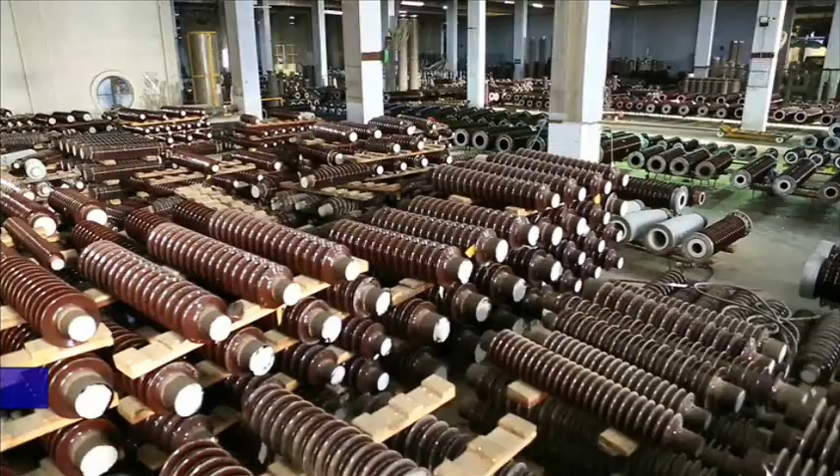Modern Insulators Limited was set up at Abu Road, Rajasthan by the Modern Group in 1985 in technical collaboration with Siemens Germany, a world-renowned company in the power sector, for manufacturing of high voltage and extra high voltage aluminous porcelain insulators. The group, led by Mr. Sachin Ranka, has 4 manufacturing divisions as under: Modern Insulators Limited, Modern Terry Towels Limited, Modern Denim Limited, Modern Foundry Iron and Aluminum Metal Castings. The Modern Group has a sales turnover of approximately $100 million.

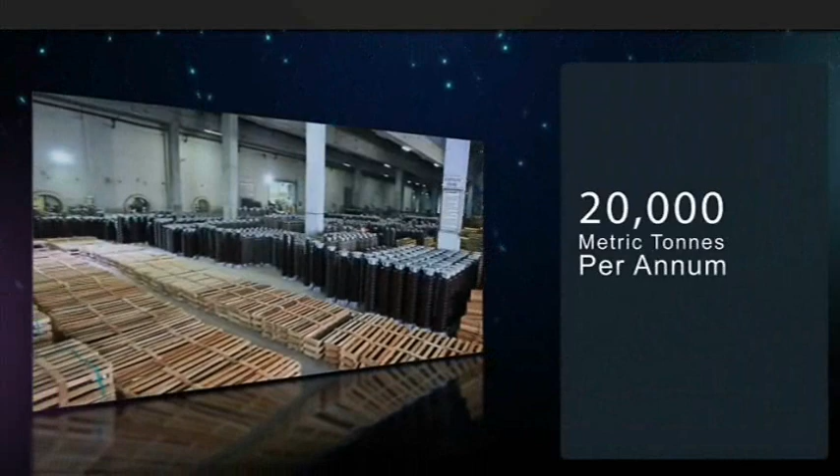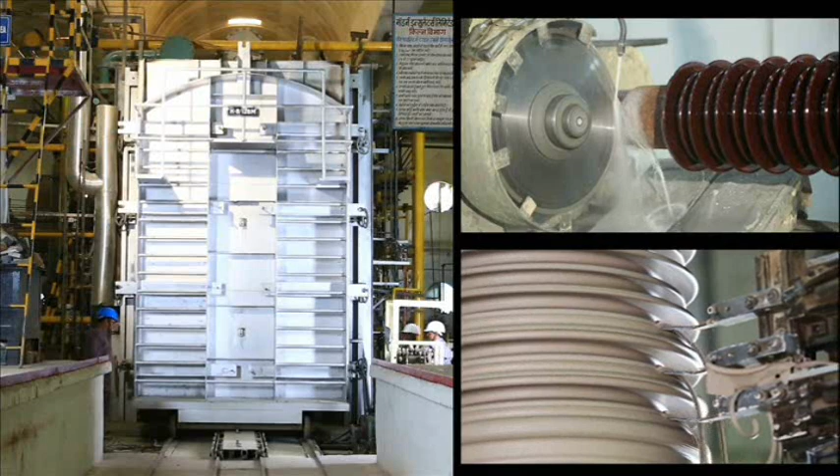The insulator plant currently has a capacity of 20,000 metric tons per annum. The export turnover exceeds $15 million, which is around 30% of the sales turnover. Modern is an ISO 9001 and ISO 14001 certified company. Modern has the most sophisticated manufacturing plant, with machinery imported from Germany, along with required testing and inspection facilities.

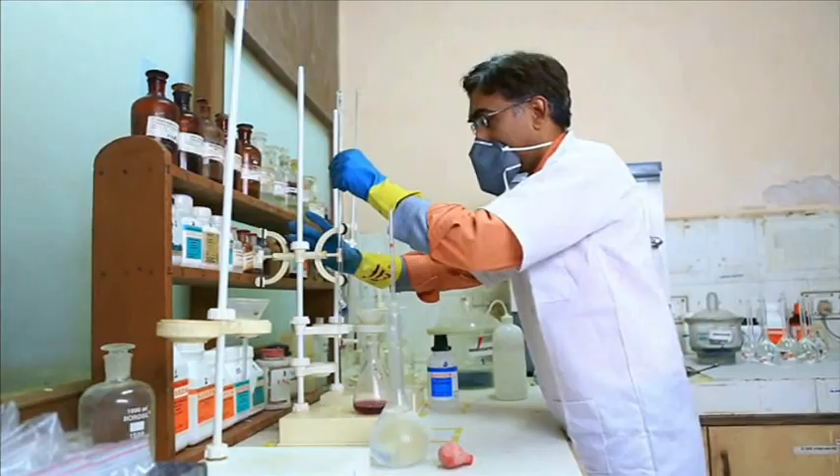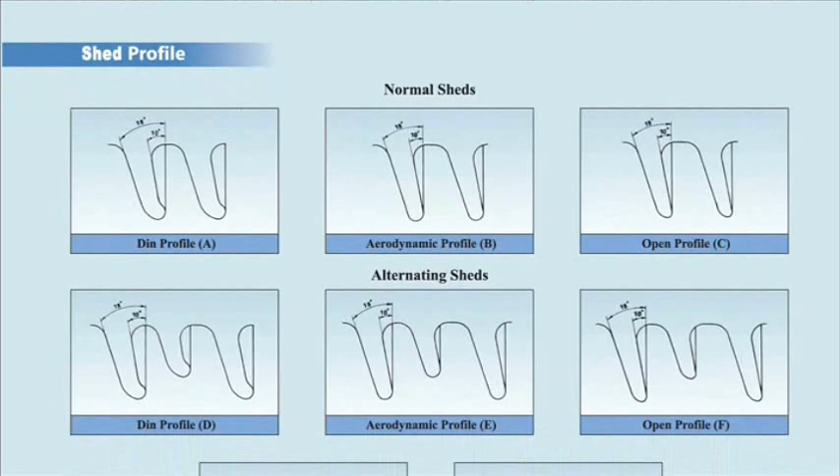Modern also has an in-house R&D setup recognized by Government of India for development of new products and process improvements. Design and development is done with latest setup and updated through computer-aided designing. Insulators are designed as per various shed profile parameters, which conform to all Indian as well as international standards. Special type shed profiles are also manufactured to meet application of insulators in highly polluted areas.

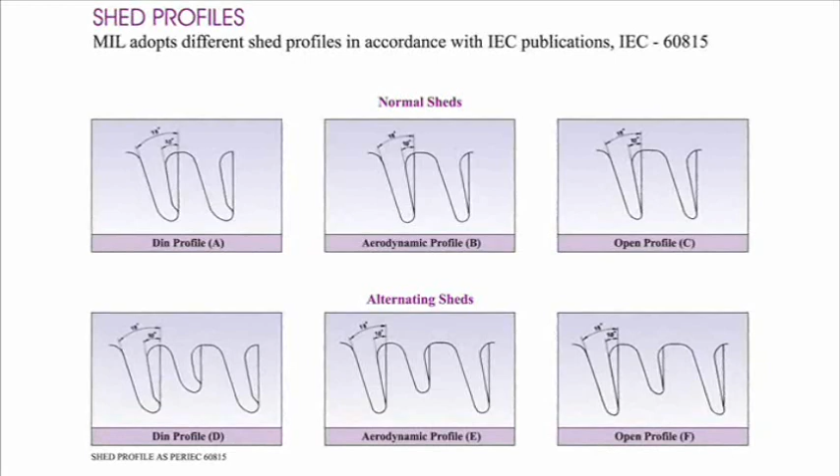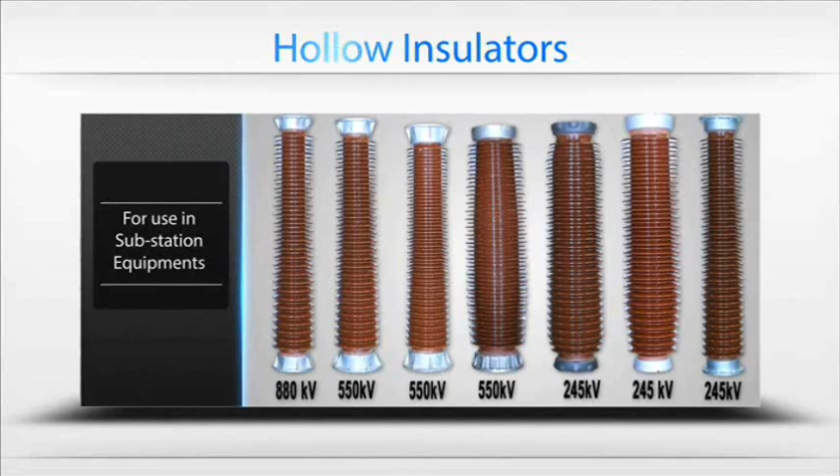Solid core station post insulators are used for high voltage disconnecting switches and in substations for bus post applications as well as wave trap supports. High pressure, high strength hollow porcelains are used for SF6 circuit breakers and instrument transformers. Modern manufactures various varieties of 25 kV solid core insulators required for railway electrification. Modern is one of the major suppliers of insulators to Indian Railways.

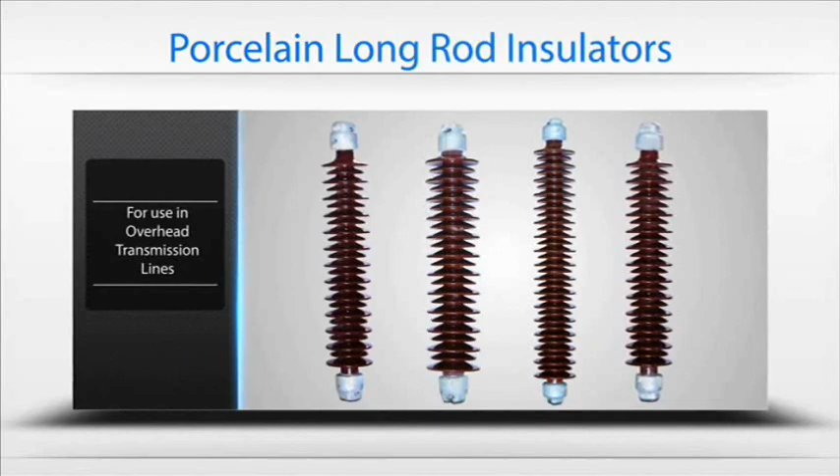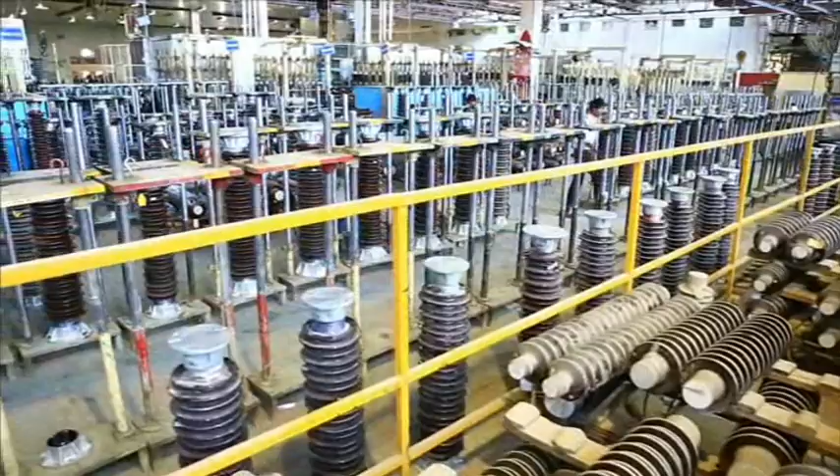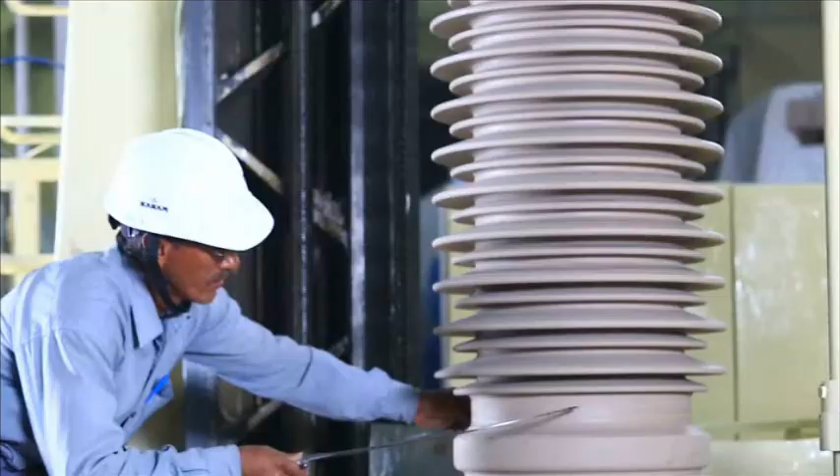Modern also manufactures long rod insulators for overhead transmission lines, which have distinct advantages over the conventional disc insulators. Modern is the first company in India to introduce the technically superior product for transmission lines as an innovation in the power sector. The plant receives technical support from many ceramic experts with respect to latest innovations in the ceramic field. Stringent quality control measures adopted in the entire manufacturing process ensure performance and reliability in service. Modern manufactures aluminous porcelain insulators with wet process technology.

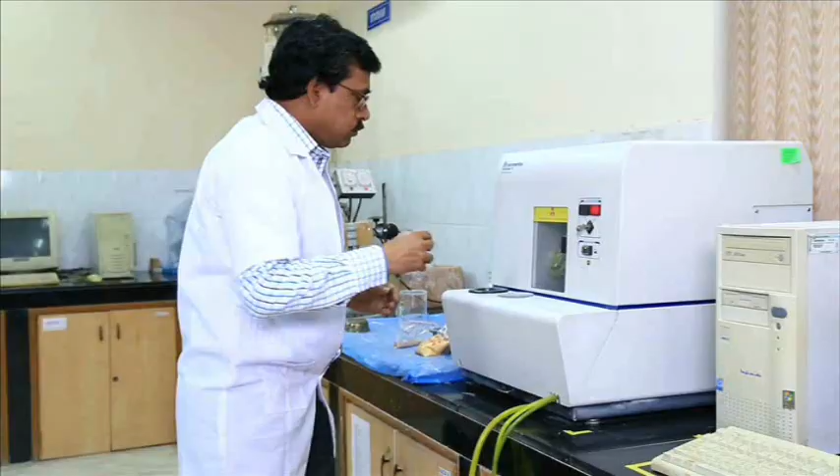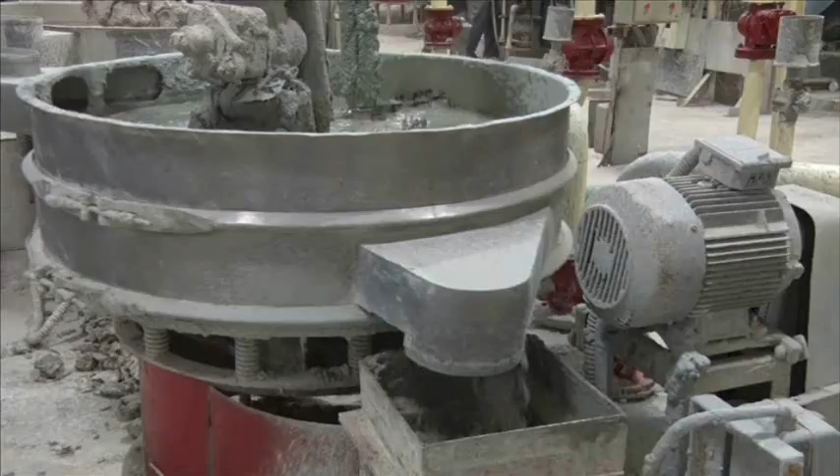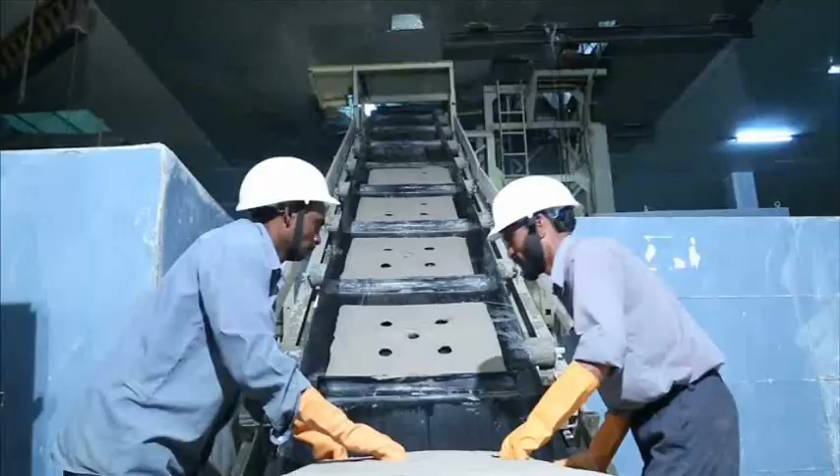The production process for manufacturing aluminous porcelain starts with a selection of raw materials. The raw materials received from suppliers undergo thorough testing at the in-house laboratory. After approval, the raw material is charged into ball mill, which carries out the grinding with a wet process technology. Liquid material in the form of slurry is prepared by this process. Slurry is filtered through ferrofiltering system to remove iron particles from it and then sent to filter press. High pressure filter presses are installed for cake preparation. These cakes are then transferred to pug mill through belt conveyor.

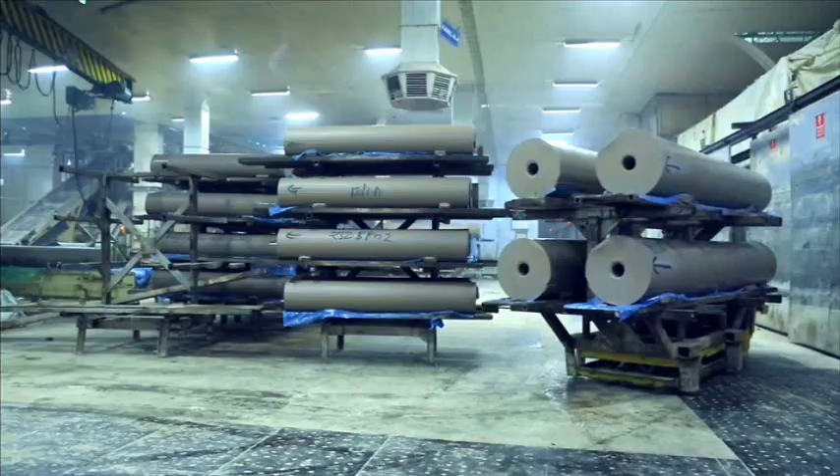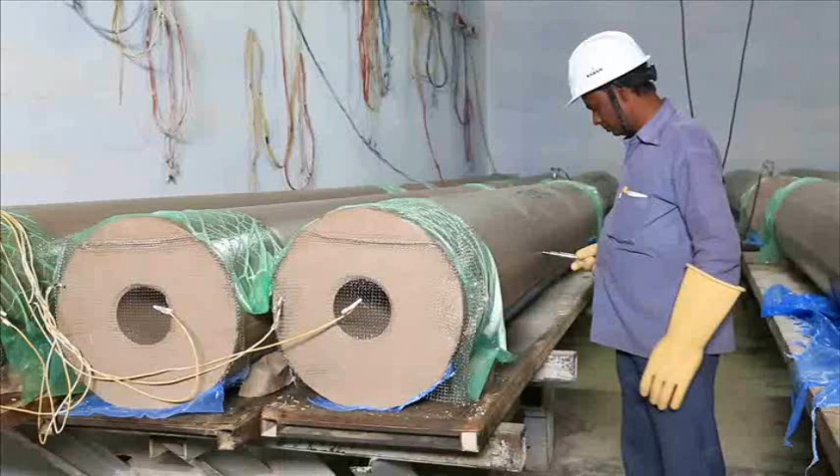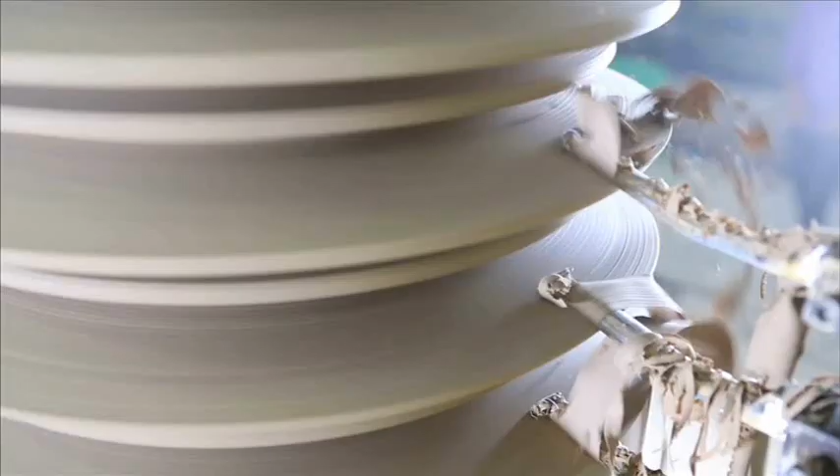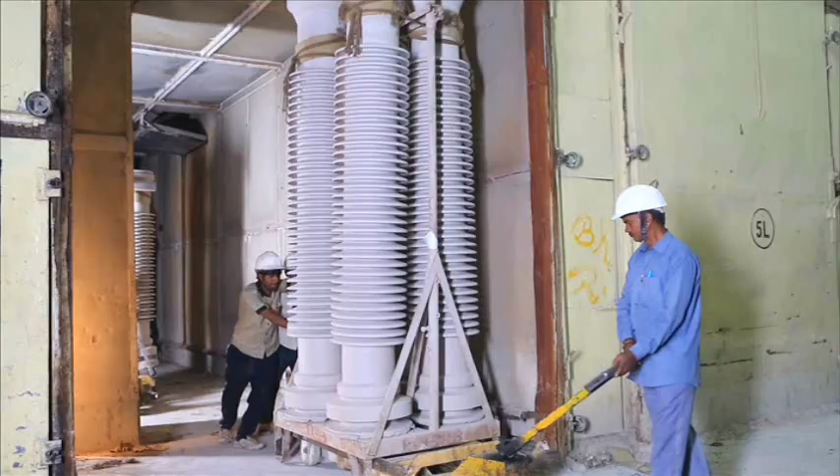Homogeneous pugs are extruded in high vacuum pug mills for solid core and hollow insulators. Pug electric drying controls moisture content, and online temperature is constantly monitored through data acquisition system in the control room. The pugs are turned in CNC and photoelectric automatic vertical shaping lathes. Greenwares are dried in microprocessor controlled dryers. Dried greenwares are then sent for finishing, glazing and graveling processes. The different glazes are tested in the plant's laboratory through glazing in brown, grey or any other color as per customers' requirements.

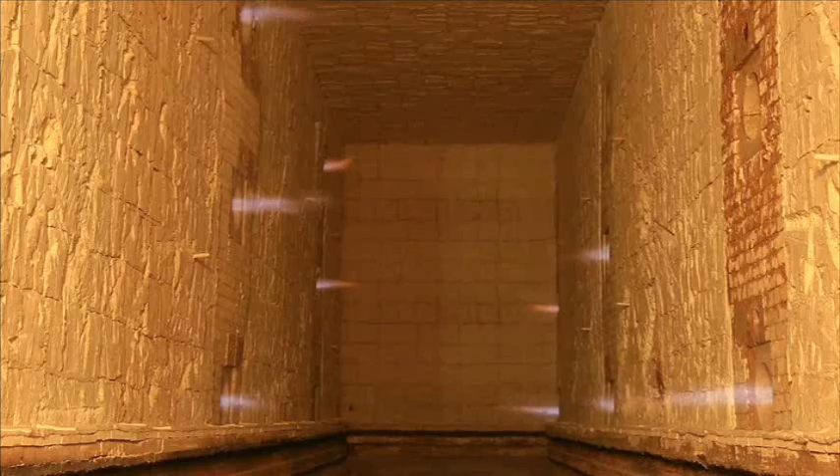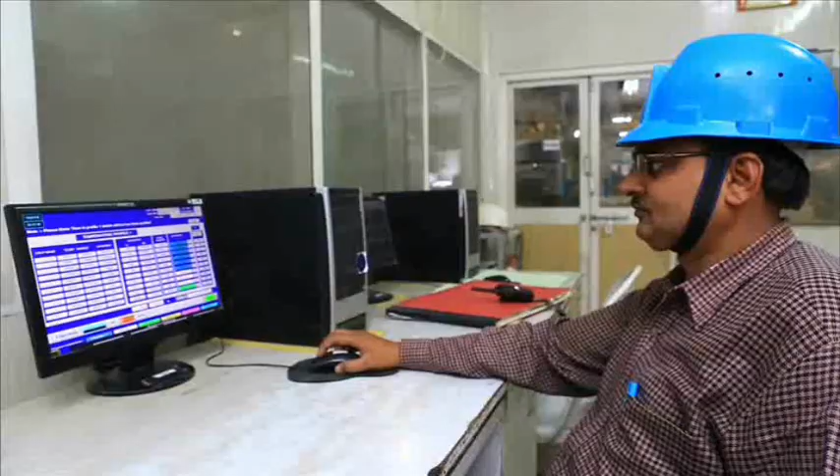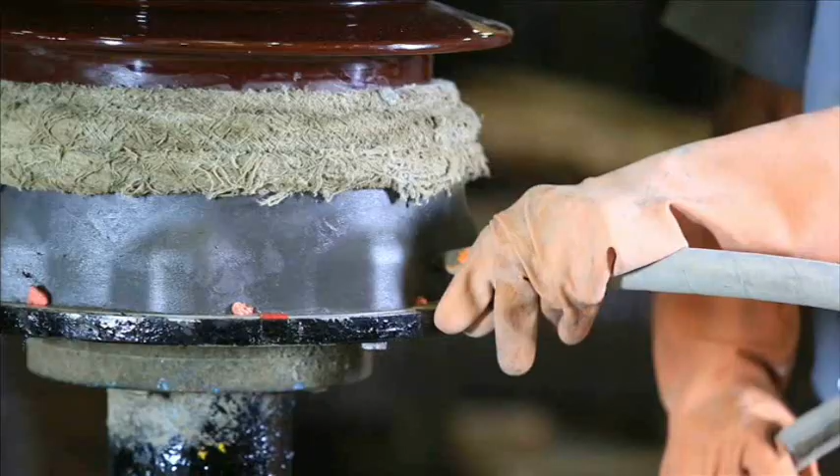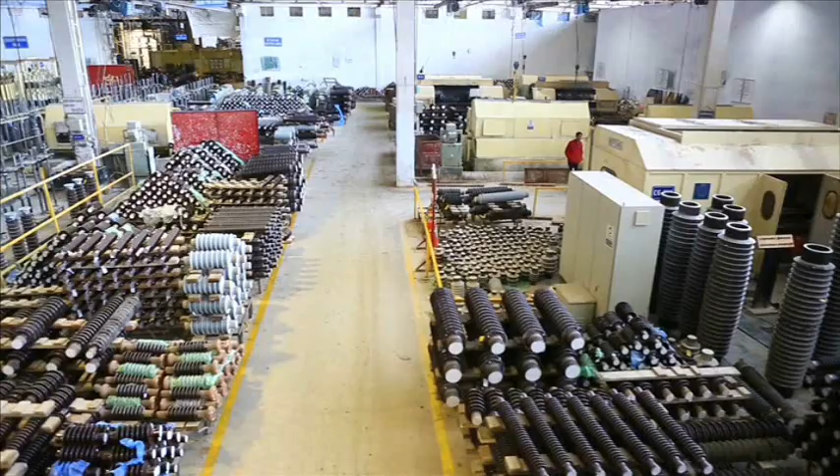Glazed wares are fired in PLC controlled, gas and oil fired auto-operated shuttle kilns with high-speed multi-fuel burners. The firing temperature is about 1230 degrees centigrade. Fired insulators, after unloading from the kilns, are checked thoroughly to eliminate the defective pieces. The assembly is done by high-pressure injection method. The cement used is of special type, collected from approved suppliers, duly tested for mechanical and other properties and stored properly. Finally, each and every insulator undergoes routine plus special mechanical and electrical tests to comply to customer specifications.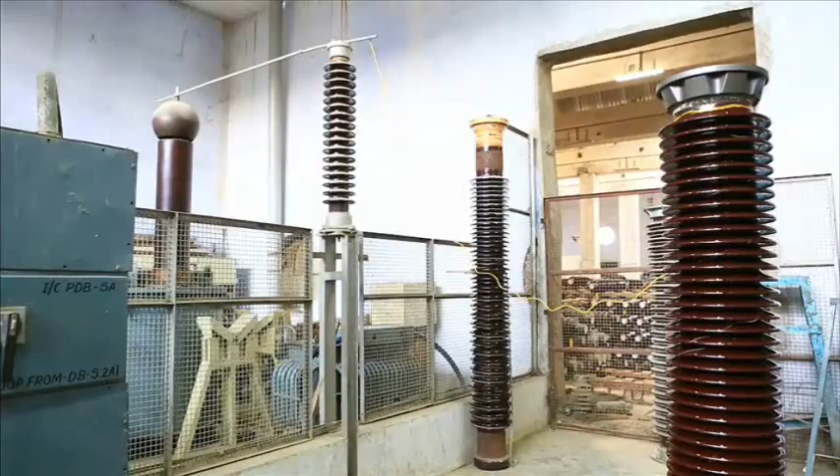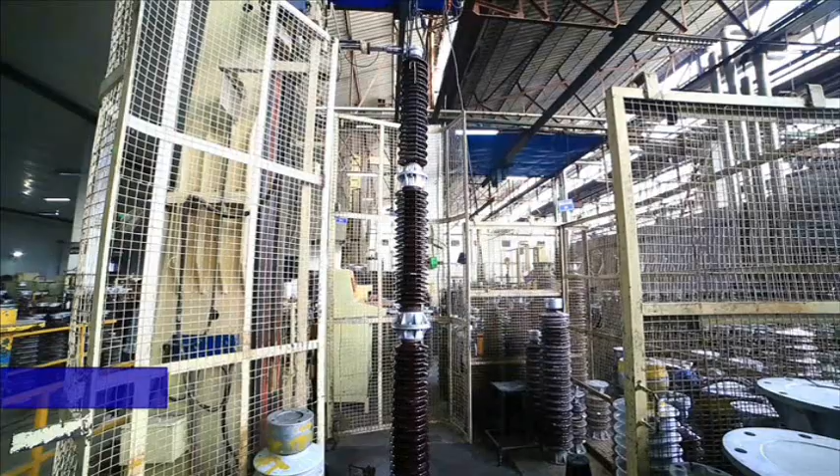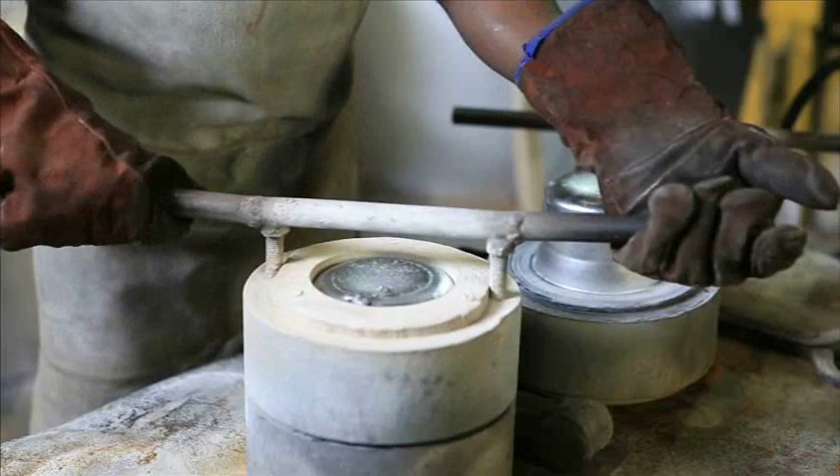Tests include porosity test, ultrasonic test, and routine mechanical tests like tensile test on long rod and railway insulators, bending test on solid core post insulators and hollow insulators, and pressure test for hollow insulators. Other type test facilities include temperature cycle test, all mechanical and thermomechanical tests, vibration tests, etc. Metal parts are subjected to galvanizing, chemical and mechanical tests as per standards. As a part of backward integration, Modern has set up its own metal foundry to manufacture SG iron and aluminum metal parts for captive consumption, as well as to cater to requirements of various different industries.

Modern has a dedicated marketing team and an extensive marketing network in India and abroad. Regular buyers of Modern insulators in India are ABB, Alstom, Bharat Heavy Electricals Limited, Siemens, Crompton Greaves, L&T, Indian Railways, Power Grid Corporation of India, all state electricity boards and various utilities. Modern's valued overseas customers are ABB Group of companies in Sweden, Germany, Russia, Egypt, as well as Alstom in France, Italy, Russia and USA, Siemens in Germany, Italy, Brazil, Canada and US, and many others.

Commendable efforts by Modern on export development have brought laurels to the company in the form of export awards from the Ministry of Commerce, Government of India for many consecutive years. Modern has a proven track record of quality, reliability and delivery performance. Milestones and achievements of Modern: First Indian company to design and manufacture long rod insulators for high voltage transmission lines up to 765 kV. First Indian company to design and manufacture long rod and solid core insulators for high voltage application up to 1200 kV. First Indian manufacturer to regularly produce and supply porcelain insulators with NL profile sheds for European market.